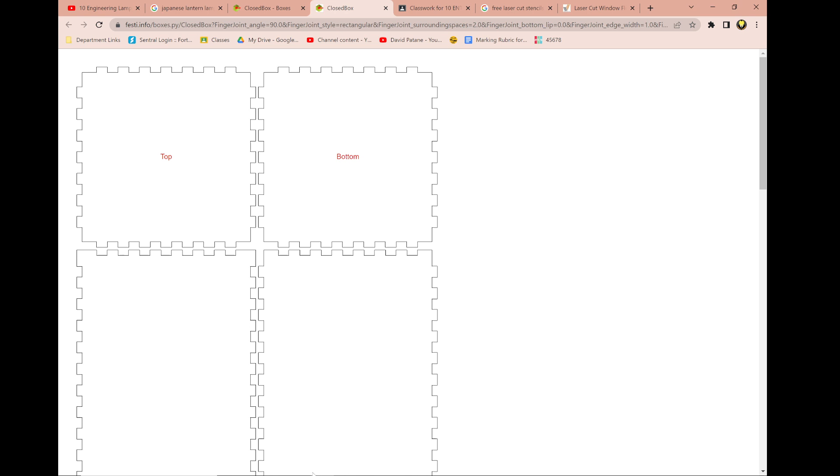Then we press over here, we can press generate. And the website should, over here, make all the file for you. This particular one, I just wanted to make a regular box. So this looks like a rectangular prism. It has 6 sides, so this will be the top, bottom, wall 1, 2, 3, 4. And here's our reference piece down the bottom that we can measure to make sense.

So we're going to right click and save it as. And we'll just save it as, what will we save it as? Lantern. The website's on the Google Classroom.

So now I'm just going to import it into Illustrator. Let's pause, I just want to make sure. So we have our thing downloaded now. We want to place it. I want to place it into an Illustrator file first because I want to modify it to get some nice looking shapes out for it.

I'm going to go here, go to File, go to Place, and I put mine onto the desktop over here, this lantern template over here. Double click that. And if I click somewhere over here, we now have the template of our lamp here.

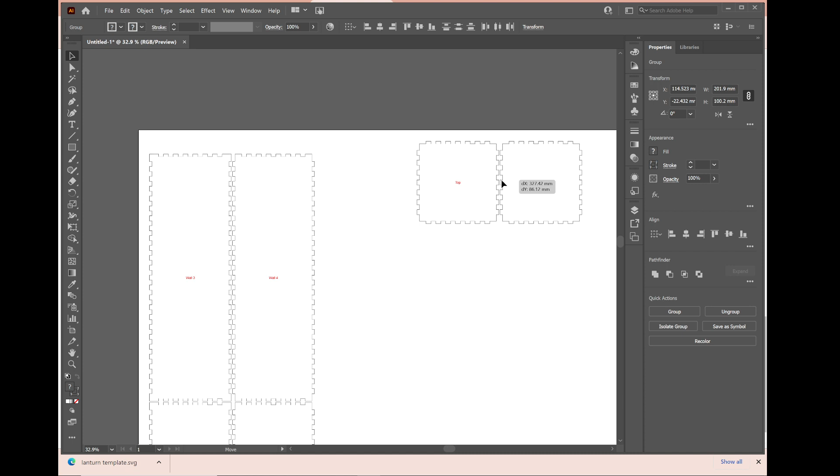For the sake of this document, I am going to make it, should I make it larger? I just have to rearrange some things because it's all not going to fit on this paper. I can right click, ungroup, and now that it's ungrouped, I should be able to click and drag and move the objects around. I can move this object over here, and I can also rotate this at 90 degrees to put it over here. For my design, I'm not going to be changing the top and bottom anyway, so that's fine.

Move this object over here, and I can use this opportunity. If I click this rectangular piece over here at the bottom, it should say the dimensions. I see the width here in the top right-hand corner is 100 millimeters. So according to my Illustrator file, the size is correct.

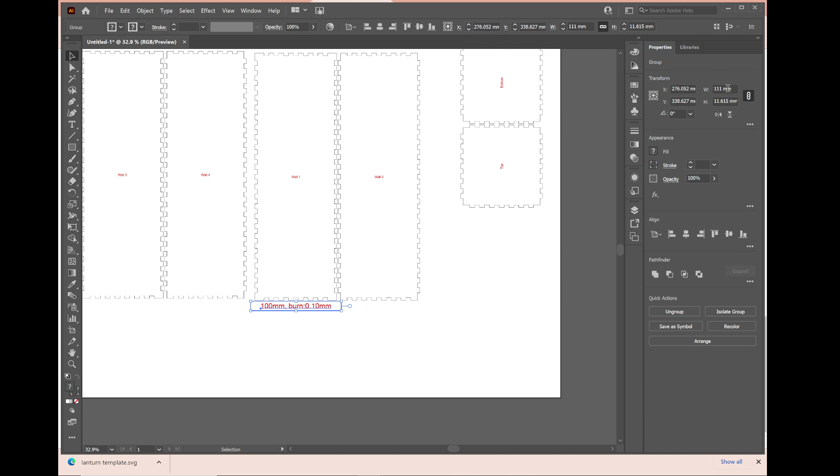From my experience, if you try to put this into Fusion 360 and get it back out of Fusion 360, the size might be off. Alright, so I have this file, and if I were to cut this on the laser cutter, I would change the colors of everything, but we don't need this for now. I also don't want these words in here because I don't remember if they're going to have a problem with Fusion as they're importing, but I don't need them anyway.

I know what's inside my design, but if you have a design where it matters what's the front-facing piece, they are coded in a particular way, as in they interlock with this top section in a particular way. So you might want to keep that and remove it at the very end.

I want some sort of pattern on this, so it's not just a rectangular wall. I'll keep one of them flat so we can see the flat one in Fusion. For the rest of them, I want a pattern.

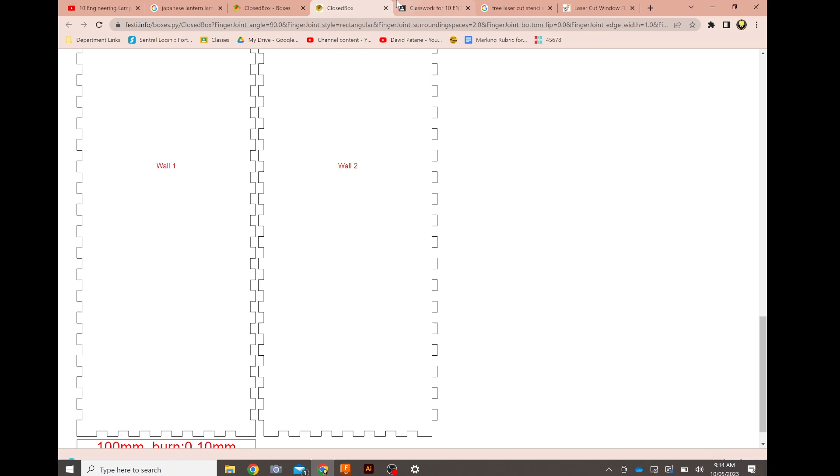So I just went on Google and looked up free laser cut stencils, and these ones look nice. This is something where it's useful having the laser cutter for a purpose like this, because this design, to do it by hand, would be very difficult.

So I want to do this. I have these designs over here, and now I'm going to go one step even easier. I'm not even going to import this file. I'm going to show you how to do an image trace, which you may have done in Year 7.

Otherwise, we can do it now. I'll just screen cap this using the Windows keys, and I want this style over here.

I'm going to highlight that, and once I've got this style copied, I can go back to Illustrator. I can press this button, press Control V, and now I have this style.

I have this artwork here that I can do something with. Actually, I'll take that back - I'm going to do it on a new sheet, just so I can get it set up, and then I'll copy paste it over when I'm ready.

I have this over here. Now this is a bitmap, which means this should have - I can't zoom in, right? This will have individual pixels, and the laser cutter doesn't like this. Fusion 360 doesn't like this. I have to convert this bitmap into a vector image.

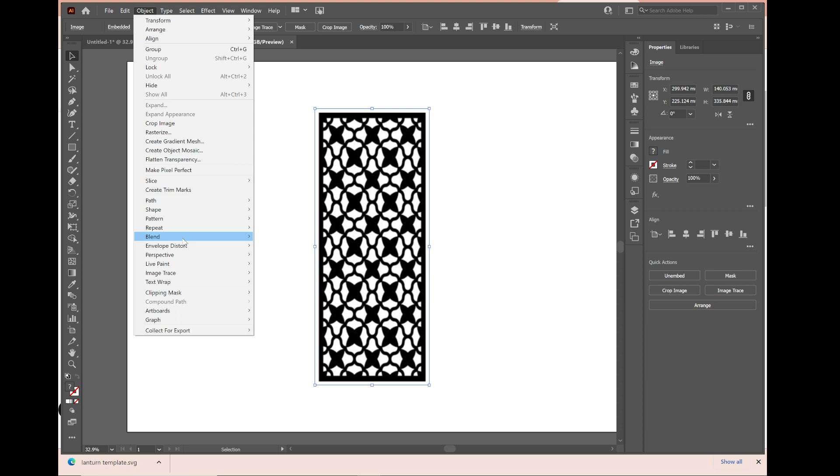So I can click it. If I click the image, I can go over here on the right of the screen and press the image trace, or I can go to Object and Image Trace, and press the Make button, and it should - now this object is a vector.

If we zoom in, we can see over here the lines are wobbly, sure, but they are very precise lines. If we compare that to what it was previously, that was bitmap. How do I go back now? Forwards. Redo. Okay, all right, cool.

So now this is something I can use. Let me just get my zoom out - too much. All right, so I can get this image, and I actually want all these pieces in the center.

So I have this thing over here. I'm going to press the expand button, and what that allows me to do is separate the individual components - if I double click it, I can separate them.

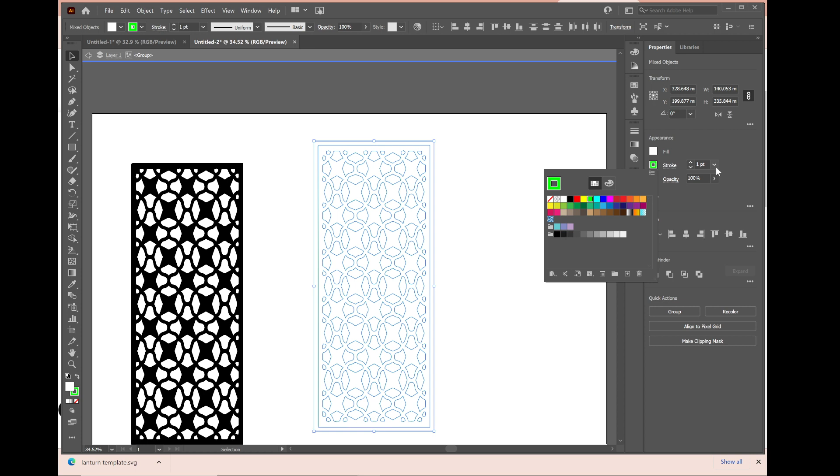So this over here is the backgrounds of everything, and if I highlight over here, we have these are the things I want to cut out. Just so I can see them, I'm going to give us a color - let's just call these green for now, just so I can see it as I move it across the screen.

I don't want these two border pieces, but this is the part I want - I want this part in the middle. So I'm going to hover over this, and I can copy that using Control C.

Over here, click somewhere, I have this part that I want to cut out. Now I'm just going to scale the size to something that makes sense on my drawing. I could be very precise here by changing the width and height in the top right hand corner of my screen, but for the sake of this I'm just doing it quickly. And then I got this shape over here.

Now let's say I want another thing. What's a meme that's relevant now? Ah, yes. It's not even an energy drink, is it? No, yeah, we've got to get - yeah, let's make it expensive.

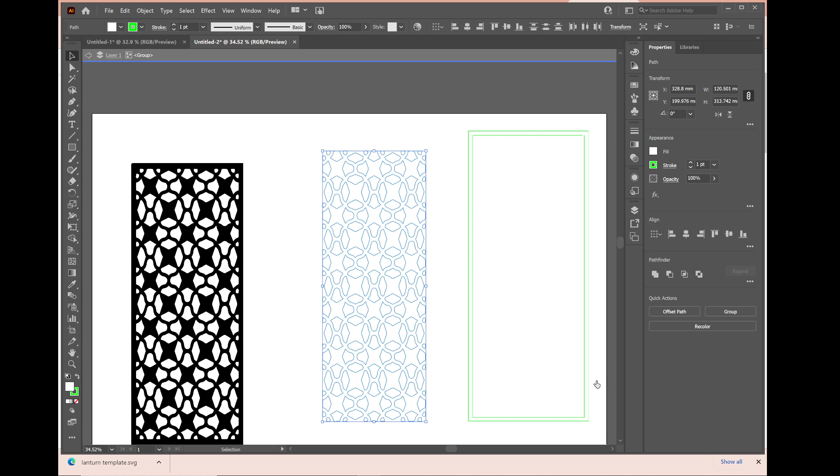So let's say I also want my thing to have Prime energy drink on it. I can right click, copy image, go back to the page that I was on before. Let's just start a new one again, just so I can keep the old stencil. Right, I have Prime energy drink. Control V - it is huge.

Can I change the size of this? All right, it's a huge file, it's a huge image, but also it's got black and white and colors. The first stencil we had was just black and white, very simple.

This one is a bit more difficult, so I'm going to go to image trace again - Object, image trace, select the object, image trace, make. It's fine, do it, I believe in you, computer.

Oh, that somewhat worked. So I have this image over here. Now we'll do the same thing - we'll expand, we'll move it outside. Now this object didn't work as well as our previous one.

It didn't work as well because this was a real world object. How image trace works is it finds the color gradient from something that's very black to very white, and then it picks a number in the middle, and that's where it makes a line. So since that's the case, I'm just going to try to get this part in the middle.

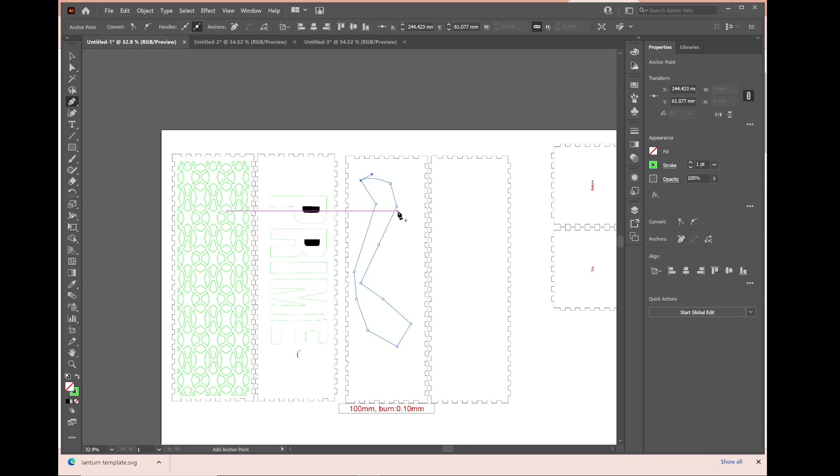And then I can also make a shape myself if I wanted to draw something with an art pen or something like that. I could just do a- right, this isn't. Look at that artwork, sheesh. I'm basically the Bob Ross of CAD.

All right, so I have this. Now I want to import this into Fusion 360 so I can actually get something. So I'm going to go to File, I'm going to save as, save this on my computer. I'm just going to save this all onto the desktop.

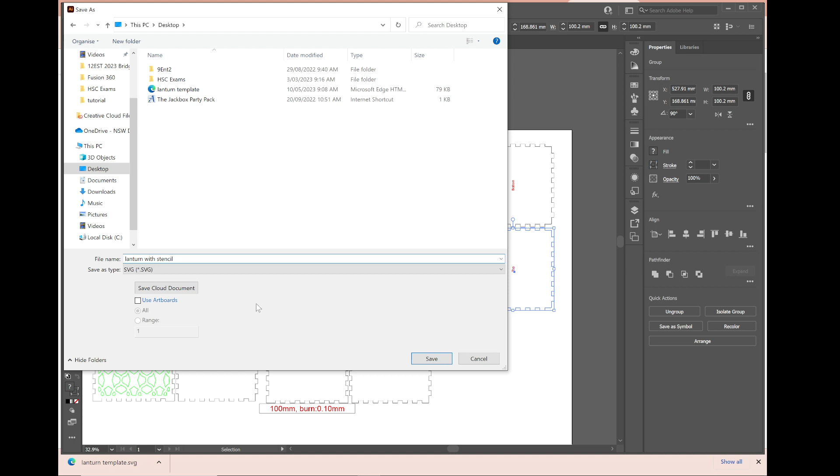I don't want it to be an Illustrator file, I want it to be an SVG, and I want it to be lantern with stencil. Lanterns with stencil, okay. Now let's go to Fusion 360 while this is saving. Save. We go to Fusion 360.

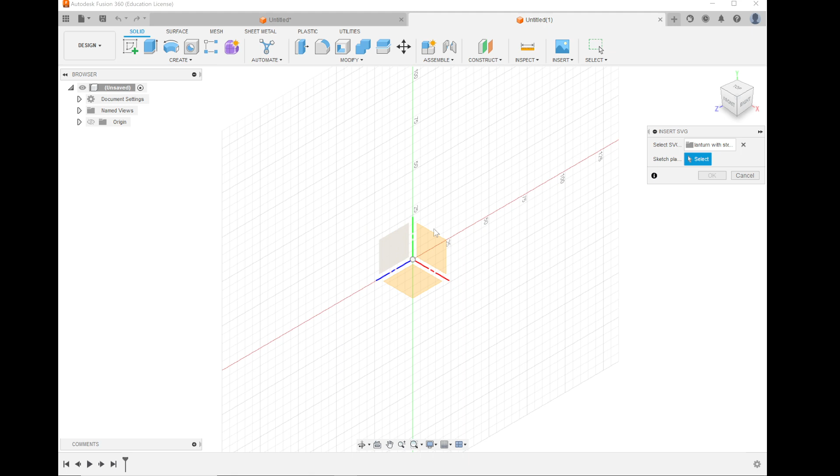In Fusion 360, I just started a new file over here. Before we do anything, we are going to go to Insert. If you press Insert, you can insert SVG over here - scalable vector graphics, I think. I press down the button, I press Insert from Computer. I go to Desktop, and I should find my lantern with stencil. I've got to pick where I want this. This is going to be like a sketch, so it's going to be 2D. I'm going to press here.

Nice, look, I've got all my images over here, ready to go. Oh look, it does keep the text, so we've got to get rid of that. All right, press OK. Give it a minute to be happy with its life choices.

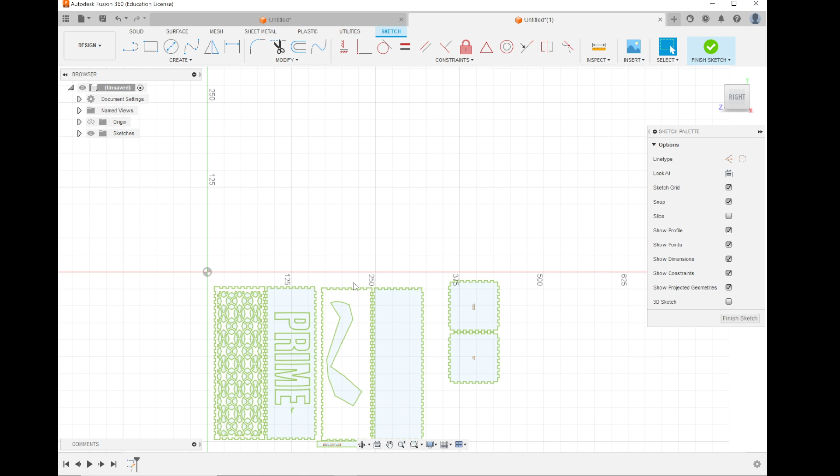All right, so we have these sketches now in Fusion 360. Now, my laptop is relatively high power. When you're importing these sketches, Fusion will do it, but it will get really laggy really quickly, especially if you start to have a really intricate shape. For processing purposes, a thing with little tiny curves uses more processing power than a massive object with a bunch of straight lines, because Fusion and SVG files in general work on things mathematically.

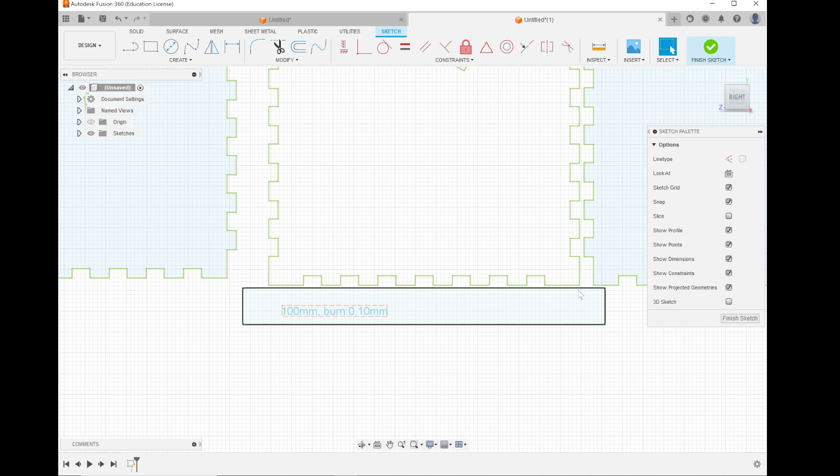So this line over here, like this thing down the bottom, this 100 millimeter thing over here, this is just two lines of math code basically. It says a line from this point to this point. Doesn't use a lot of memory. While these curves over here, each one of these is its own parabola, or imagine like a parabola but with more terms to it.

And so this is one formula for this line, this is another formula for this line. So as you do this, it gets more and more complicated as you go. Your computer might start lagging out.

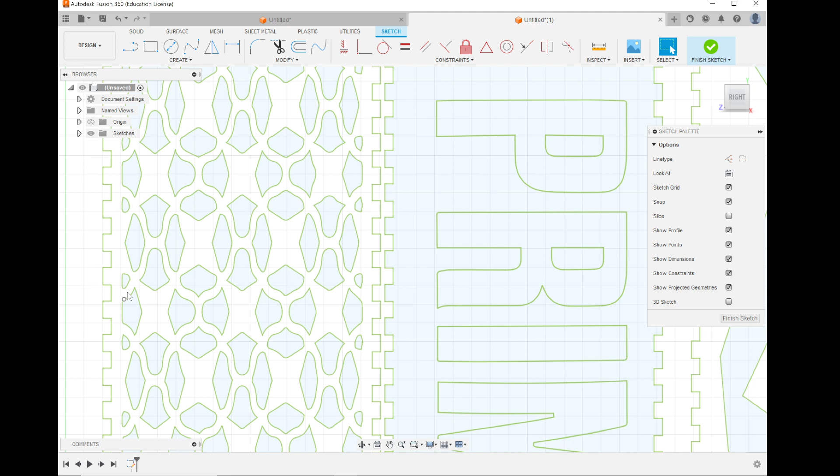So what we're going to do, to get it out of the lag zone as fast as possible, we will actually select - is this not closed? No. Before we do that, notice we have a color difference over here. This one over here is, how would you say, it's like shaded blue. Can you see it on the projector? Right, this is shaded blue, while this one is not shaded blue for the most part.

That means, according to Fusion 360, this is not a closed object - there is an opening somewhere in here. Now, I don't know how to find where this opening should be. Oh, is that it? I think I found it.

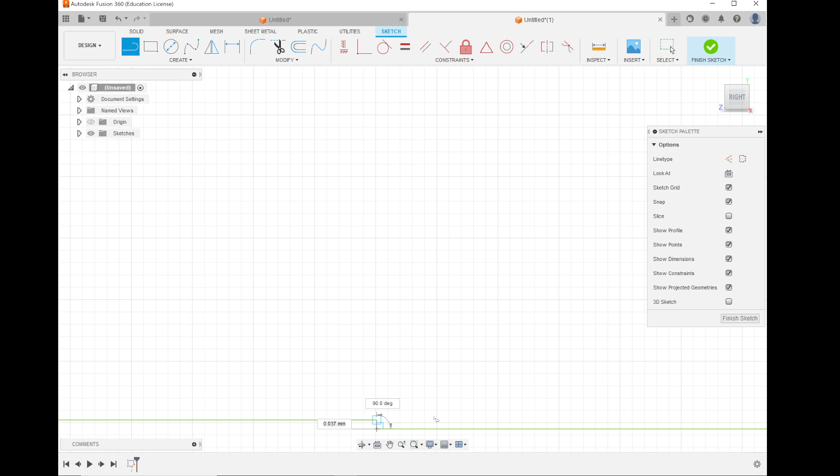There is a way to close it. We're still sketching, you can just link that. We'll see, let's see if it loads up.

We want to get it out of this sketch. It was, yes, good. All right, so that's one. That thing would be ready to go. This one, it's probably in the same spot.

I don't think this is an error due to... I think this is an error due to the code that we got from that website. That website was actually made by a bunch of people in a hackathon, so they made the basic part of that website in 24 hours as part of a competition. Obviously it's been upgraded over time, but it's still done by like some dude in a basement on a laptop. So I thank them for it, but the code is not the best, as it does small issues like this. And when you're laser cutting, it doesn't matter.

This joint over here is only 0.037 millimeters. The laser cutter doesn't care about that inaccuracy, but Fusion does. So once I close this, it should fix that issue for this side as well.

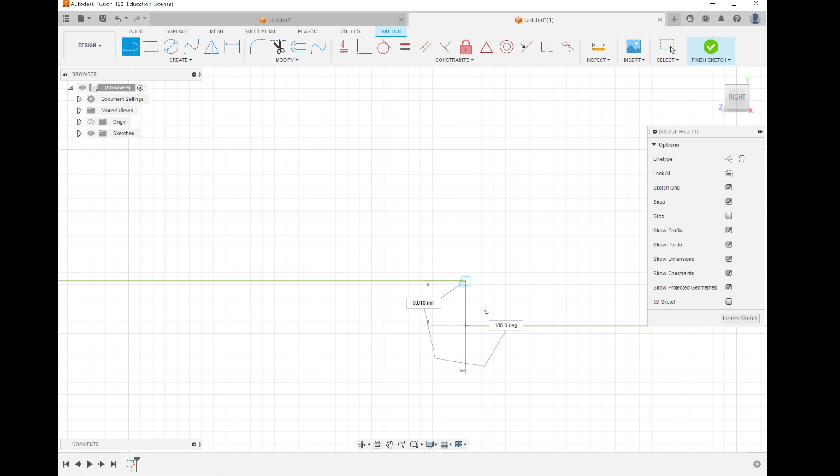Oh no, Fusion did not like that. I'm just going to pause.

All right, we're back. Yeah, this is the most temperamental part of Fusion. Do this part in a nice clean document, because when you have nothing else important on Fusion that you need to do, this is where it's very likely to crash. This is the least safe part of Fusion from a software perspective.

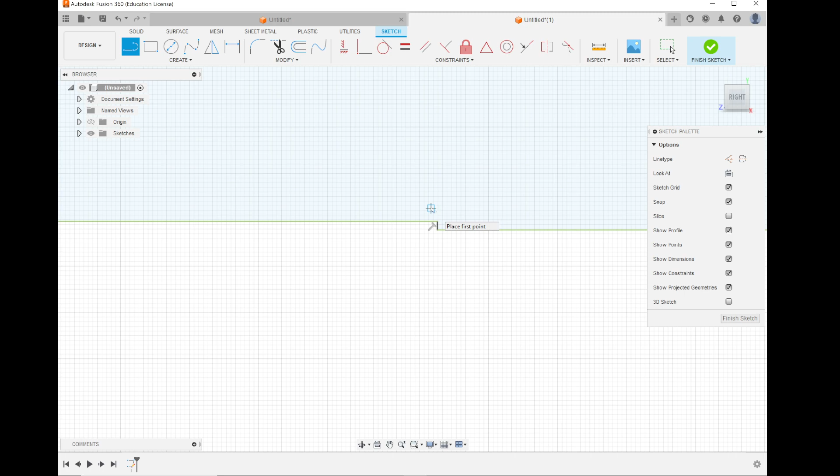It's using a lot of memory, so if you're dealing with a device that doesn't have a lot of memory, this is where bad stuff can happen. We want to turn this now into sheets of actual things.

So this is a sketch that's in 2D. By default, when you import an SVG, it's going to be a sketch. I'm going to press the Finish Sketch button over here. So now I can deal with my 3D objects.

I'm going to extrude. If I press this shape over here, it's going to extrude it for me. Fusion allows me to select multiple shapes. So for this, I'm actually going to press this as well, and we'll get to why.

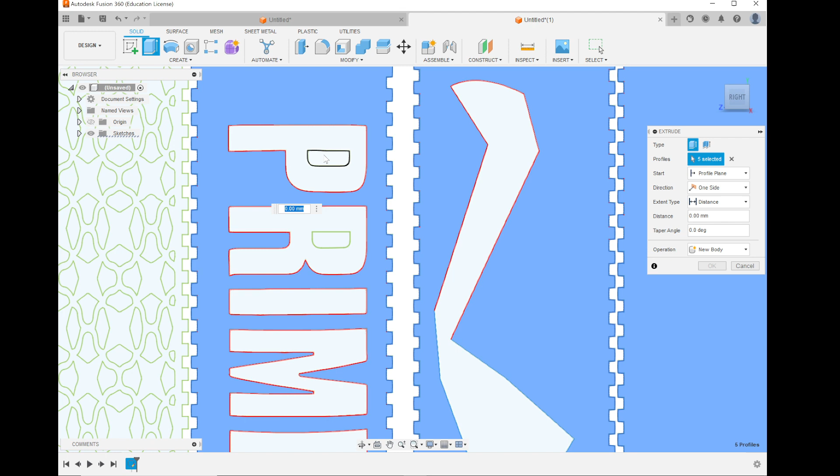We actually want, this was an artifact of our image trace. Your life will be a lot easier if you pick an image that's already a stencil. Like this one over here to the side was already a stencil, so it made it a lot easier. For this one, I'm just going to press the outside part like this. And yep, now I'm going to extrude it.

The distance I'm going to extrude is going to be 3 millimeters, because my object was 3 millimeters. So my timber was 3 millimeters, and the cut size with this was also 3 millimeters.

Uh-oh. Okay. I'll unpause it when it freezes, when it unfreezes.

So if you do that extrusion and it all works, you're now in this phase. Now, once you're in here, most of your problems are gone with regards to the processing power of Fusion. This is what Fusion wants. This is a nice, clean object for it to work with.

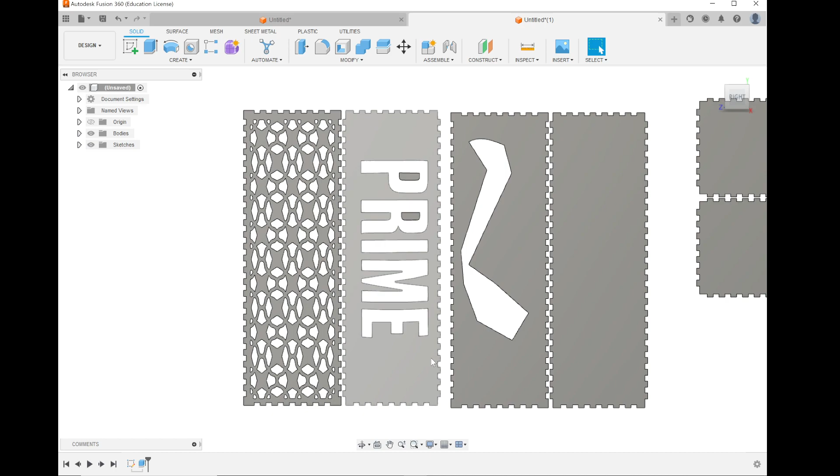You can actually move it now, and relative to before, you can move it as fast as you want, as there's no graphical problems, because these are all solid objects. Right? This is peak CAD, what it wants.

Insert the dubstep. All right, but we don't want this, we want pan, I think. Okay, so these are now my sheets. This is like what it would look like if I pumped this out on a laser cutter.

What we can do now, actually doing our design of this, is quite simple now, because we can assemble these together. Let's look at our bodies. We have a lot of bodies over here.

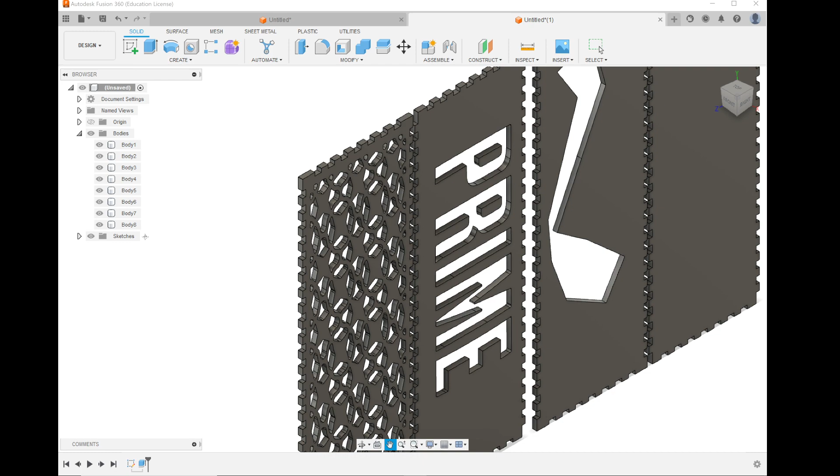If we notice, what's going to happen when I try to cut this? Yeah, it's going to fall off. We can fix this - this is where we're doing some post work to make it look better. Let's go and make like a joining piece. We can either go across, I think vertically looks the best. But let me show you what I mean. Yeah, we're going to make like a connecting piece so it will hold when we laser cut it.

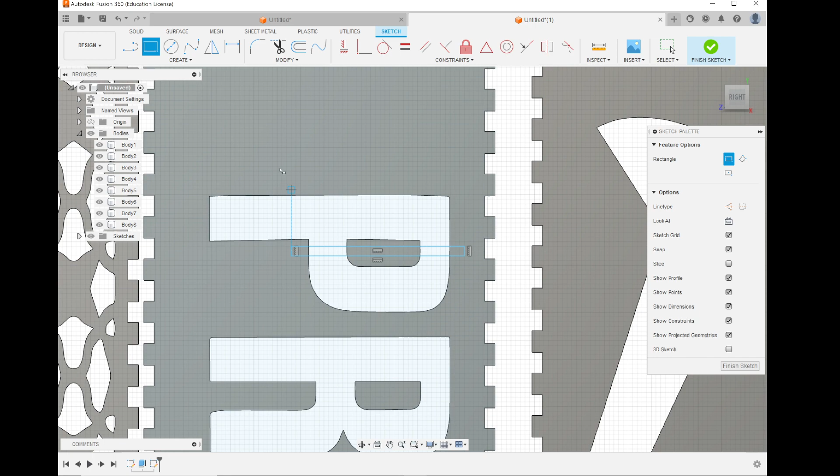It won't look exactly like Prime, unfortunately, but we're going to do something like this. You might see this before on signs - graphically they do this because they'd rather it all be on one stencil. This piece over here is 2 millimeters thick, so it's not massive. Finish sketch - this is if you're bringing in letters, or if you have an image with objects that need to be separated, you'd be doing something like this.

So now I have this object over here. I'm going to extrude - select these shapes that I just made. Here's the issue: I can drag it over here and make an object this way, no problem, but I actually want it to connect to the other piece. So as I go backwards here, I don't want to go minus 3 millimeters, because that's how thick the timber is... or is it 3? Oh, I did minus.

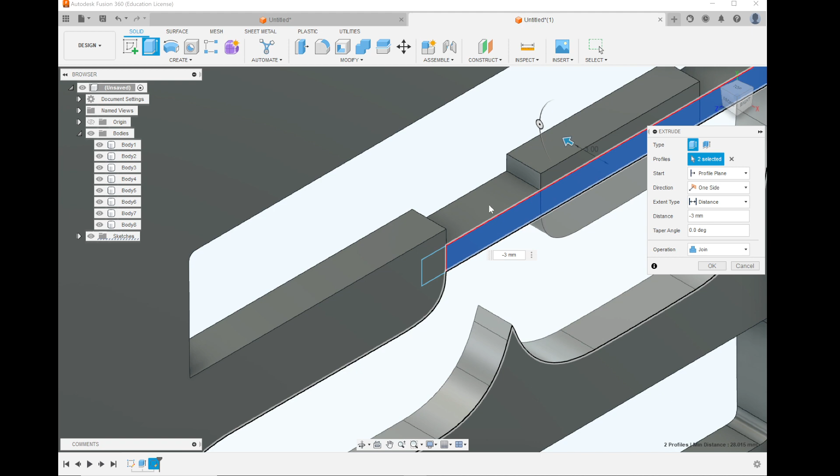So this red symbol you see over here means Fusion is identifying that you're extruding a sketch through another object - it assumes you want to cut. Because it assumes that, that's what it's doing. We can fix this under the operation area - instead of cutting, we want to join. So now these are going to be the same object. If I press OK, that's what we're going to get. It's obviously not exactly the same as the Prime logo before, but all things considered, the message gets across.

This will work. All right, now let's actually start building this lamp.

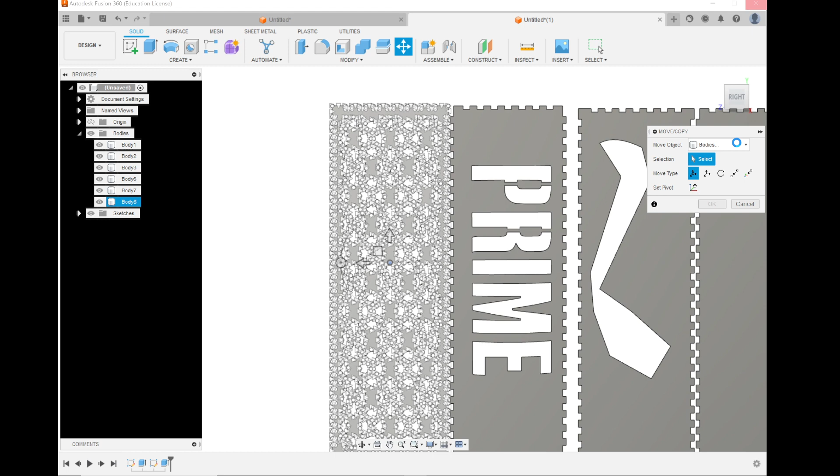In Fusion, we can move our objects around. We press this tab over here, move and copy. So I can click this shape over here, select it - I want to make sure I have bodies selected. And now I can... oh, that's pretty hectic. Can I get into 3D space, please? No? Still a bit laggy. Okay.

This object over here - do we see how these arrows and planes relate to how we want to translate it? If I move it in this plane, I can move my object in this direction, in the YX plane. I can also rotate it - over here I can rotate it 90 degrees. So I could manually move it to align it up together, and then start making my box.

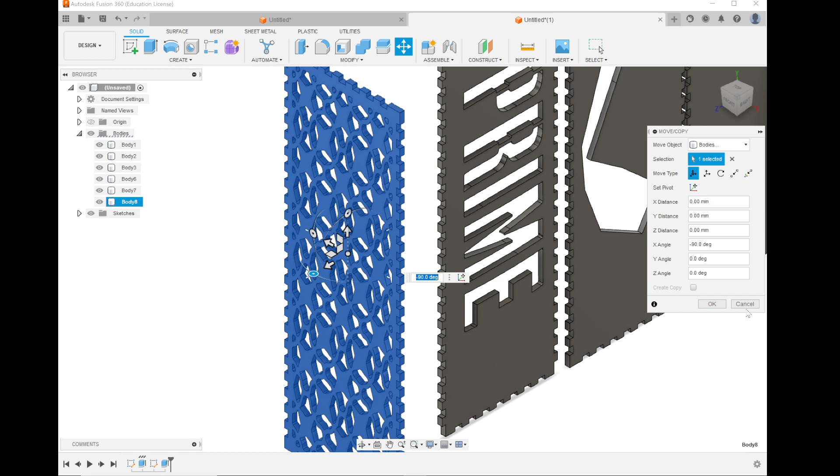But there's actually an easier way to do this. These things should all mesh perfectly, as good as they can get based on that stencil thing we had. So we're actually going to use this tool over here - the Align tool. If we look at the image on the Align tool, we get two faces and we can match them up together.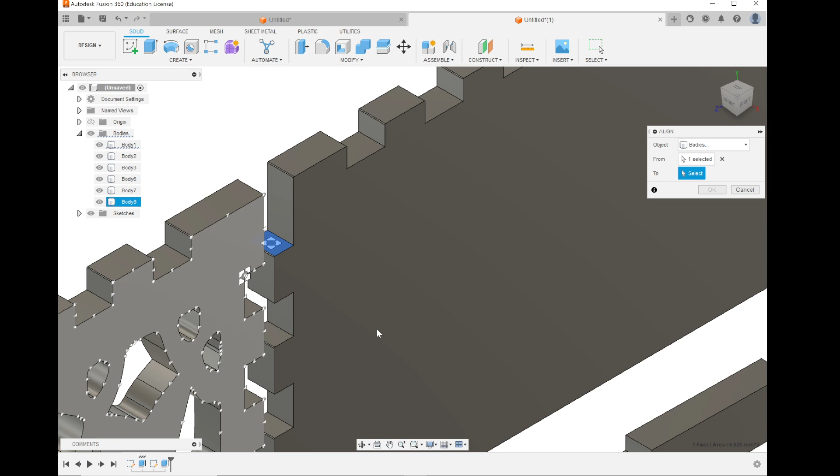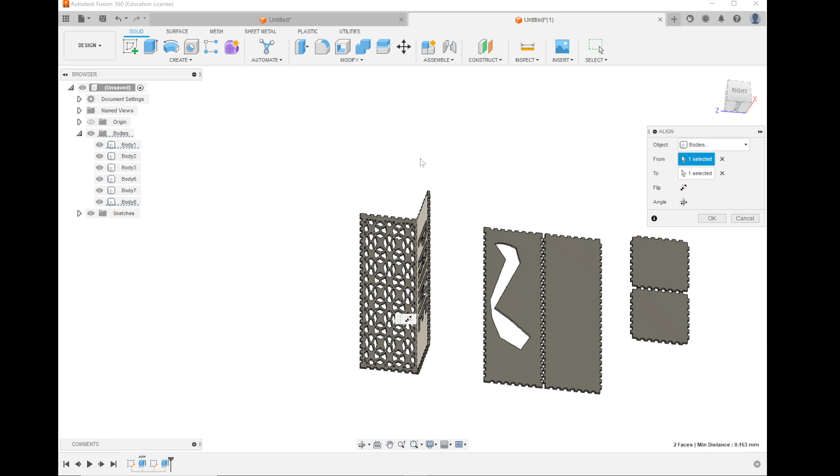So we actually want to align - if my maths is correct, this shape should align with that shape over there. But we want it to be flipped, and rotated at 45 degrees. So now these shapes... did this work? Let's see. There we go - it has automatically lined up.

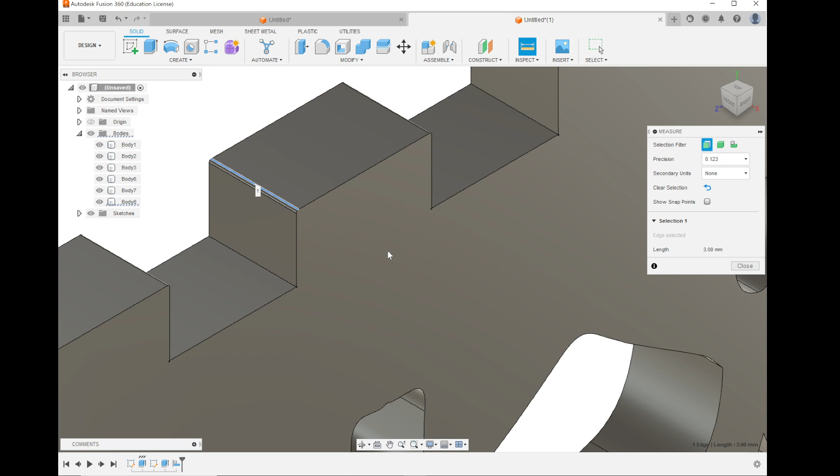Now I think there may be an issue with this sketch, I just want to test something. Inspect - if I inspect the length of this part over here, that should be 3 millimeters long. Yep. The gap over here should also be 3 millimeters long, but it's 2.1. I'm going to go back to my sketch from the start - remember how we did that line to measure? I should have actually checked first to see if that line is actually 100 mil. That original line we had there was 87.7 millimeters.

So this is an uh-oh spaghetti-o moment. That meant it wasn't large enough. So what I will do - what was the actual length, what was it? 87.75, okay.

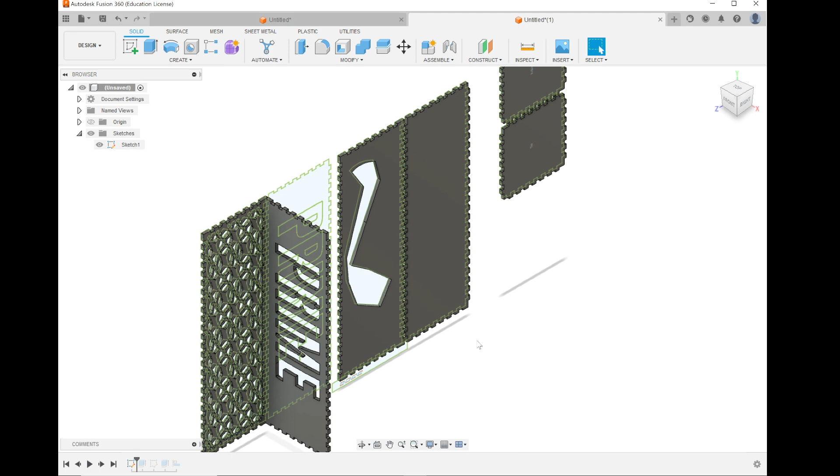87.75 - so what I'm going to do is go to my history tab, bring it back to here. Scrolling my history tab back, we're in this phase over here - I actually want to enlarge my drawing. What I'm going to do is create, edit sketch. In this sketch, I am going to - where's the scale button? Sketch scale. Right, I'm going to select all the entities I want.

I'm going to select a point that they're all going to scale by - let's just make it the origin. And if I go down here, I have to pick what scale factor. My original size was 87, and I want it to be 100 - how much larger does it have to be? Anybody? Matt? Anybody? Maths extension! If your original size is 87.7 and you want it to be 100, how much larger does it have to be? 0.2, what? Well, we're lucky that we can put in formulas inside our thing - 100 divided by 87.75.

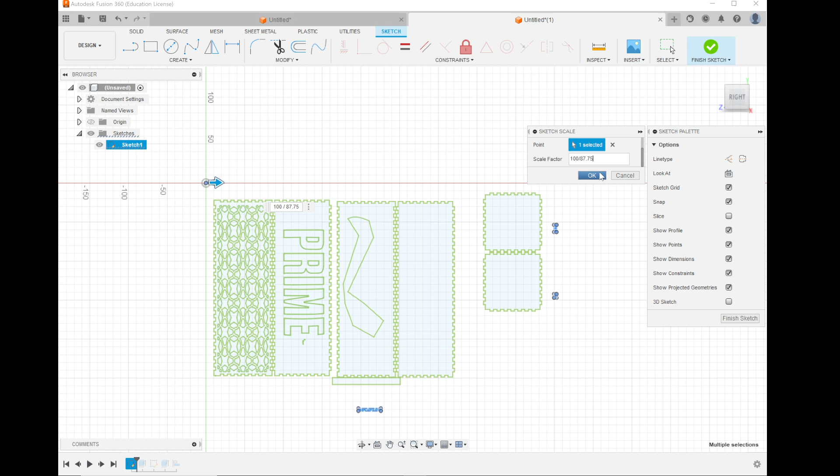87.75. I can actually put that number in, and then if I press OK, if it works, come on, we should get that scale in.

Now, if we inspect this element over here, oh, what? Why didn't the scale work?

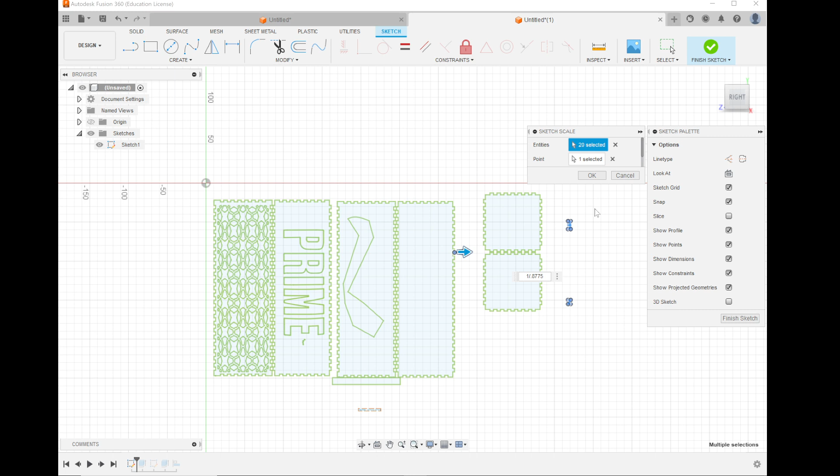Uh-oh. All right, instead of doing it in the sketch, for those that were here, instead of doing that through the sketch, I did it outside of the sketch. So I used the modify thing over here, and I just used this scale over here, and I selected the whole sketch through here. And that seemed to work, because when I measure this element over here, we get a length of 99.999, which is close enough for us.

And then we just do the same steps again. Now we don't have to change any of our previous actions for the extrusion. That should just work. We might need to change the location of our sketch for the crossbars, so we'll change that. The parts that were holding like the middle of the P — the supports, yeah, that's what I meant. Come on.

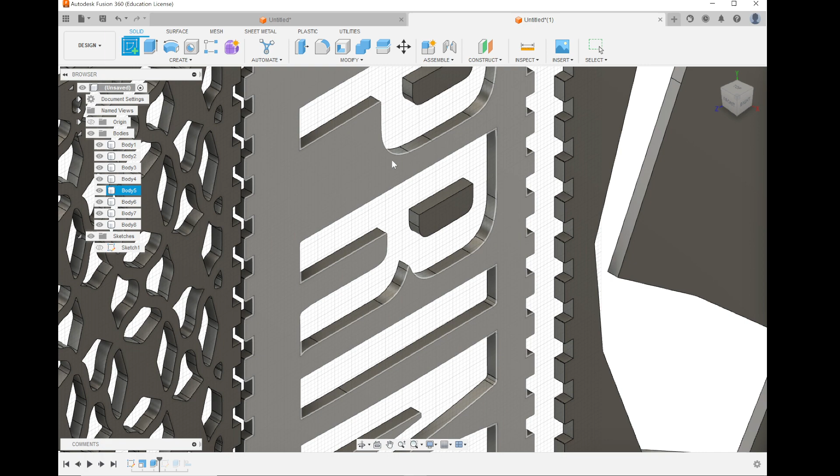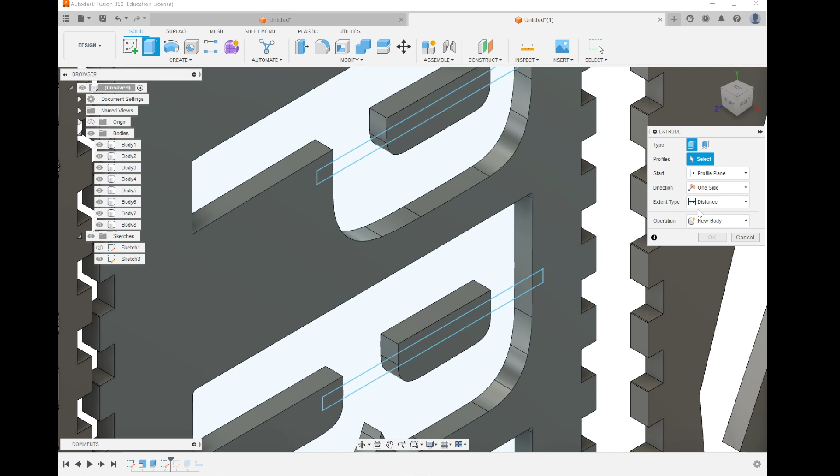So we'll just make that again. We will. And remember, we have to make this join.

All right, so I think now we're ready to start combining this to make it an object. So we're going to be using the align tool.

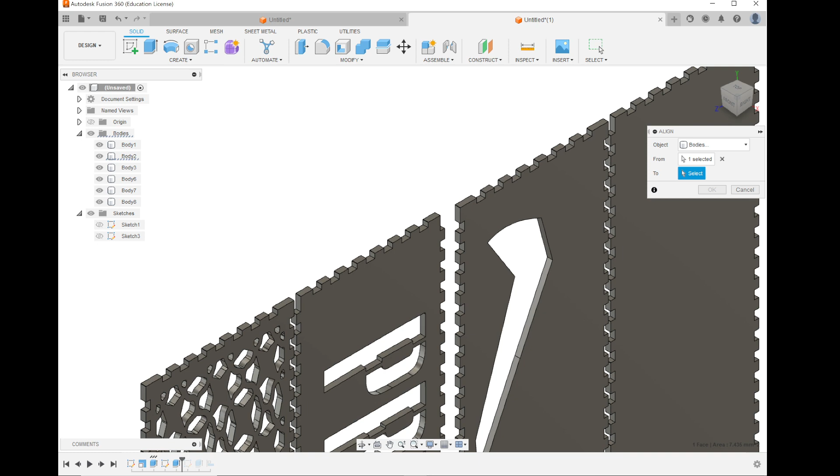So let's go and actually use these top pieces to do the alignments, and so we can align everything to this. In this case, we want this face to be aligned with this face over here.

It's going to be flipped, and it's going to be rotated. There we go. That's going to be our top piece. Okay, and then we can continue doing the rest.

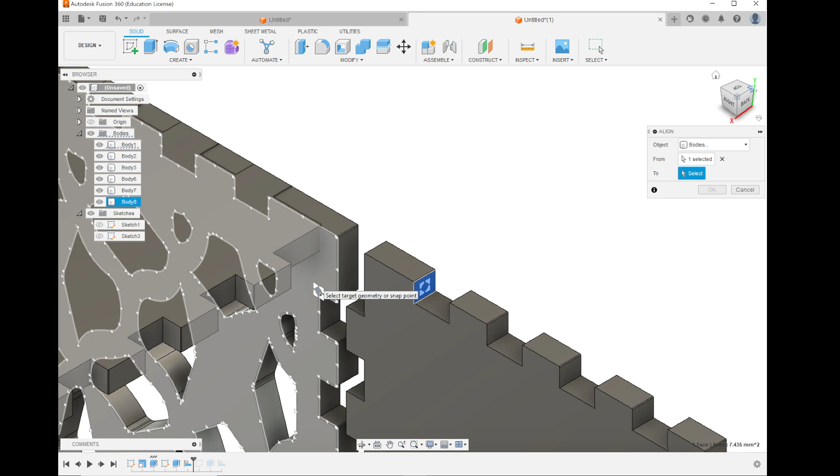We're going to align this with that piece. Flip.

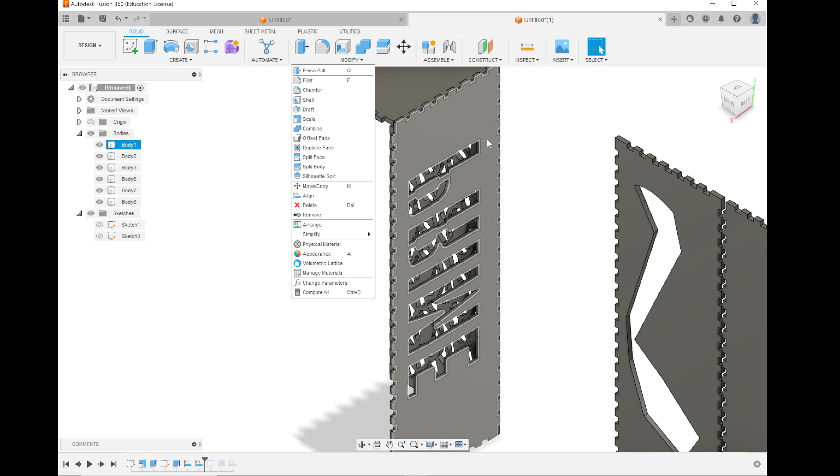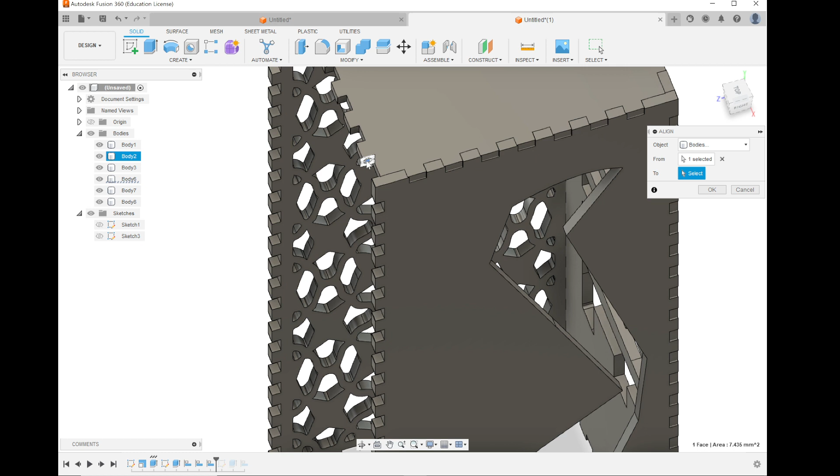All right, for the sake of this rendering, I'm not going to bother with the bottom part. Oh, should I just put it in? Yeah, why not? Let's finish it off.

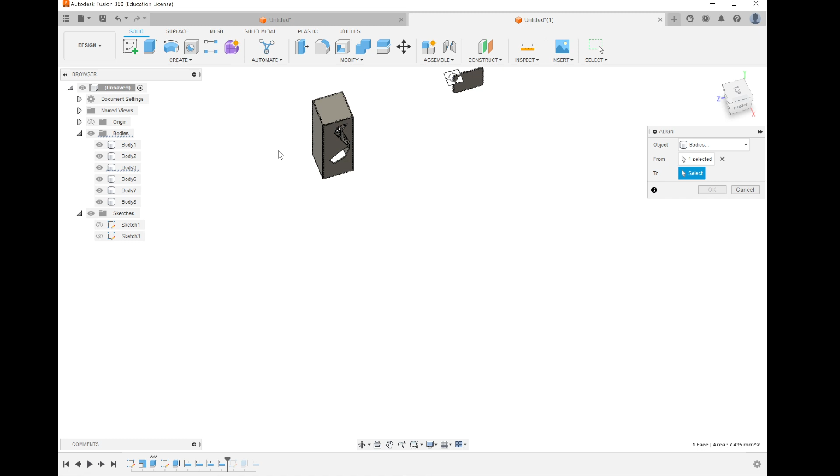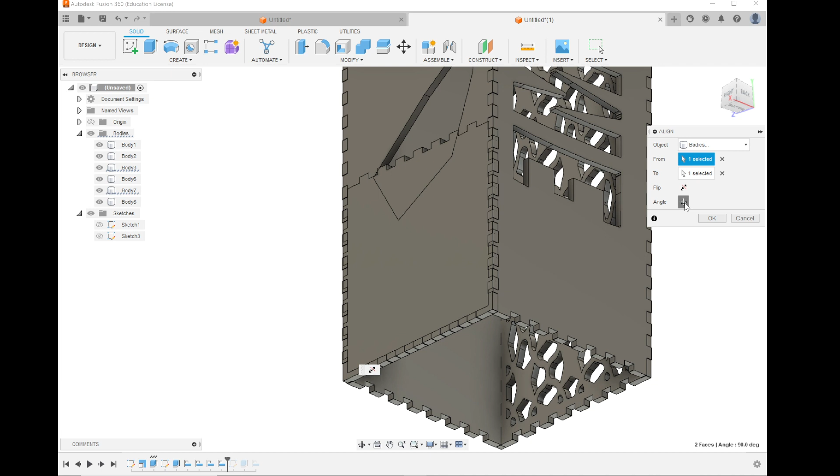Come on, zoom in, please. There we go. All right, so this thing is done. Now we have our tower and we've put it into Fusion.

All right, we're not going to make it out of this material. We're going to make our tower out of wood. So we can just actually highlight it, right click on the tree on the left, and change its appearance.

Now there are actually different styles we can go for here. Selected everything. If we go to wood, there's two types of wood, and I spoke about a bit in the previous task.

Okay, there are two types of woods in this thing. One of them is just like an exterior colourful wood, like if you imagine the graining you get on tables and such. If your object has just exterior components, that's fine. You can also do what's called solid wood, and what solid wood will do is, when you look at a standard piece of timber, what you visually see when you look with the grain is like long, thin lines pointing in one particular direction. But if you look at the end of the plank of wood, you'll see what looks like rings or part of rings.

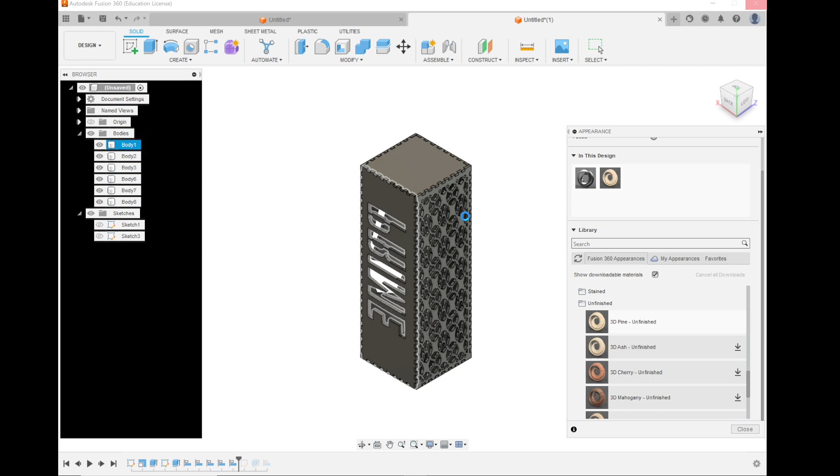So if we zoom in, see how we have that different artwork? It's making it look more realistic. It doesn't have plywood, so that's just something we've got to artistically accept.

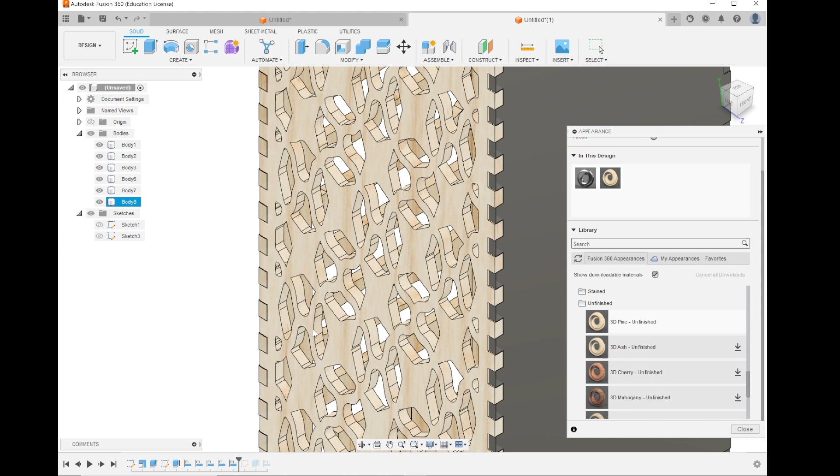It will also try to guess what is the better side of the timber, which is the side that has the long thin lines. I believe Fusion will try to predict that by whatever's the largest flat surface, which for these flat packs should easily detect it. If you're making a thing out of a solid cube of wood, it might be difficult for it to determine which one. I don't know if there's an option to manually change the orientation. There might be. You'd have to Google it to find out.

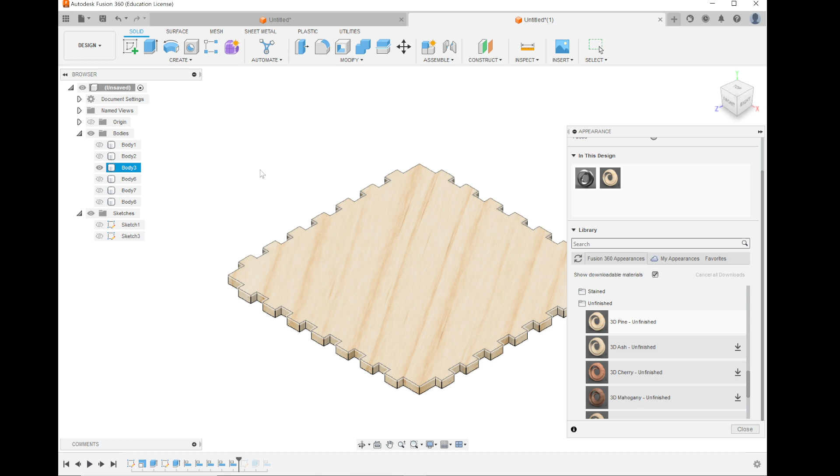So we have these things over here. Now this thing in theory could render straight away, but before we do our rendering, we need to get some sort of light source. So to do this, we're just going to make like an LED, having LED lights shining.

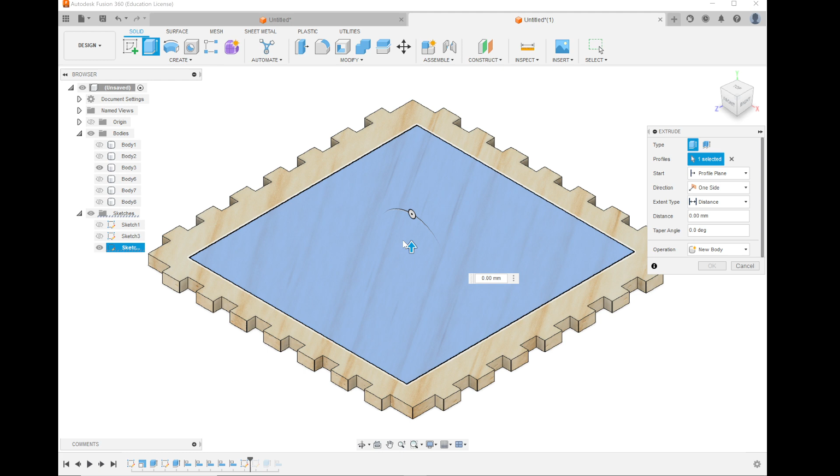So what we'll do is we'll go to Sketch. We're just going to pretend we have the lights shining up from the bottom. If I do this sketch over here and it loads up, we will just do a regular rectangle, or square. We'll press Finish Sketch. Now, this is a common mistake people have on Fusion, so I'd like you to watch this carefully. I have drawn this sketch on that piece of timber. If I go to extrude it, if I click that sketch and extrude, by default...

If it's actually touching the piece of timber, it might want to join. We don't want this to be the same piece of timber because we want to make this like a light source. It's going to be emissive. So we have to make sure that it's a new body when we make this. If Fusion detects you going into another piece, it's going to assume you want to cut. If you extend from another piece, it's going to assume you want to join them together. But if you just want to have two pieces that are next to each other, you have to make sure that setting says new body.

So new body, all right, an appearance over here. Uh-oh. Did it join them together or did it just freeze? Did we lose all of our artwork? Oh, lovely.

Oh, maybe it just doesn't do it in appearance. Okay, so for this we want miscellaneous. No, not miscellaneous. Where is it? No, not physical material. Sorry, we don't want physical material. Physical material, this is technically all aluminium because that's the default material. Or is it steel? Doesn't matter. This is more for when you're doing simulations.

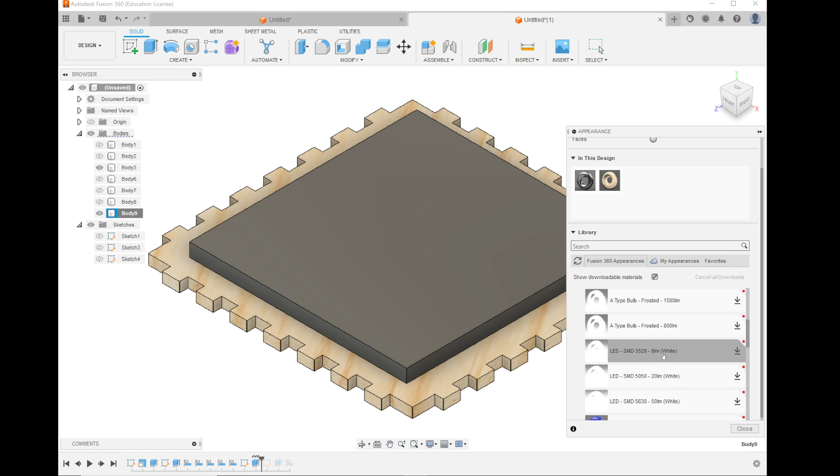My mistake, I should have right-clicked and pressed appearance, not physical material. If I press appearance and it loads up, we want to find miscellaneous, emissive, and we can just get a bulb. Or we can get an LED. We don't know exactly which type of lumens our LED is, but we're going to assume our LEDs are cheap, so we're going to pick an 8 lumen LED. I can highlight over there, that thing's going to be emitting light now at a particular rate.

I press close. Now the magic's going to happen. Before we do anything else, I'm going to save my work.

Not CNC cars. On the table, please. 2023.

I'm going to save my work because, as we know, Fusion likes to crash a lot, and at this point, we've spent almost the whole double lesson doing this. Don't want it to crash.

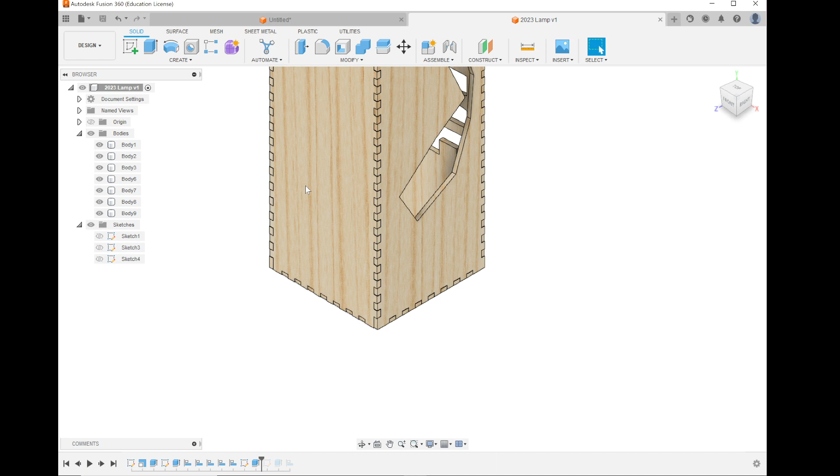I'm not going to laser cut it, no. Why? You have to change the colors to like red and stuff. We can do getting it ready for laser cutting. Add another, we'll do some renderings and we'll see. But this is ready. We can see by the file name has changed over here to 2023 lamp v1. Right, this is all good.

Now let's go do some rendering. We spent all this lovely time making it pretty and aligned. Now we have our lamp over here. We want to get that sponsorship deal, so we're going to arrange it to look like this. Right, that's our lamp.

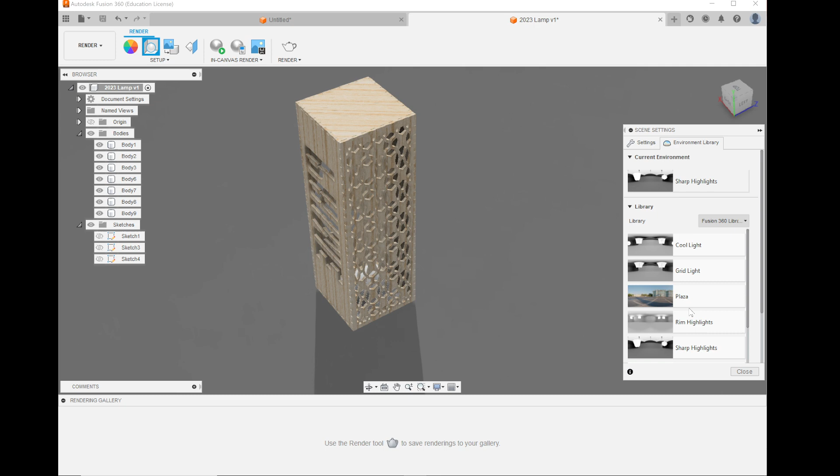Over here, can we also set up an environment? We can put a scene, I think. Environment, yeah, let's give us an environment. What environment you got? On the street. Oh, on the street, yes. Beautiful. You might be able, if you search the web, to find environments that look like living rooms or bedrooms, and then you can put those in. I don't know what template, there we go. Beautiful.

There's probably some of these environments that are like attach custom environment. Some people may already have one, so have a search to see if there's one that exists already. Let's say I'm happy with this particular setup for my thing, I can then go to render.

Now you're given a few options over here for rendering. Because you're on your student account, you can use cloud rendering. Cloud rendering means you're shipping this file to the servers in Seattle for Autodesk. They have big render farms, big racks of computers that just render this stuff, because not everybody has high-tech rendering computers.

For this relatively easy render, you could do this on your laptop yourself. I would recommend you have your laptop plugged up to power, and don't play any video games while this is happening because it's going to be using all your processing power.

Even though you have unlimited, you're still allowed only a certain amount of renders at a time. It's to stop you flooding the render farm with a bunch of renders.

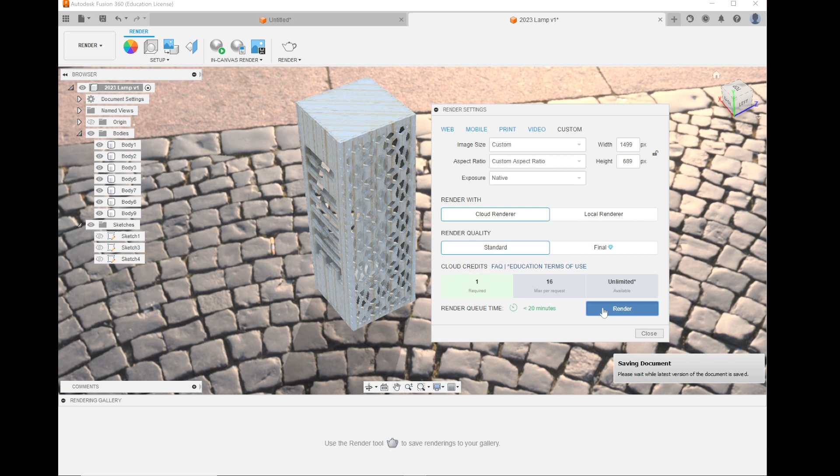Once it starts putting the rendering on the queue, I'm just going to pause the video so we don't have to wait the time. When you see this thing over here, that means it's rendering - it's sent to the place, and the place is rendering it for you. It's been submitted. While this rendering is happening, if you click it over here, it says your job is currently in the rendering queue, so it's off to the computers.

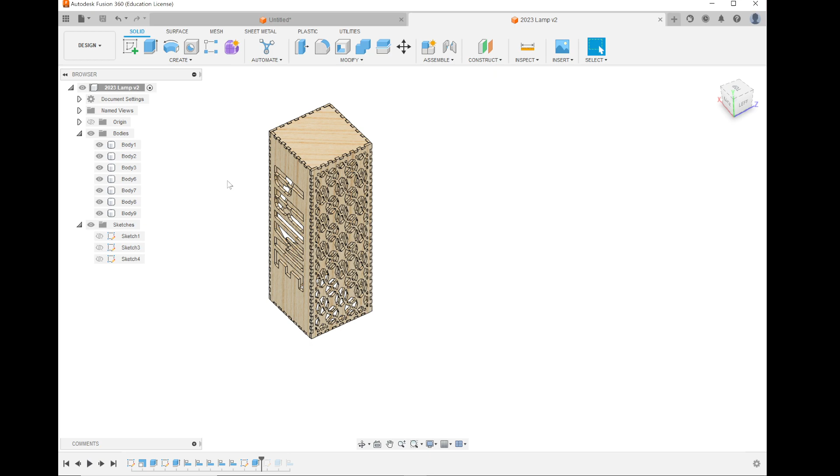I want to get this file back into Illustrator because Illustrator is how I send it to the 3D printer, the laser cutter. So this face over here is actually different. So what I can do is hide all the other bodies for now. This one over here, I want to get this surface so I can send this surface to Illustrator.

If I click on this surface and right-click it, I can press create sketch. Give it a second to load up. And if we look on the left-hand side, there should be another sketch popping up here, sketch number 5. Now I'm not going to do anything, I'm just going to press finish sketch. I've made the sketch, but I haven't changed it.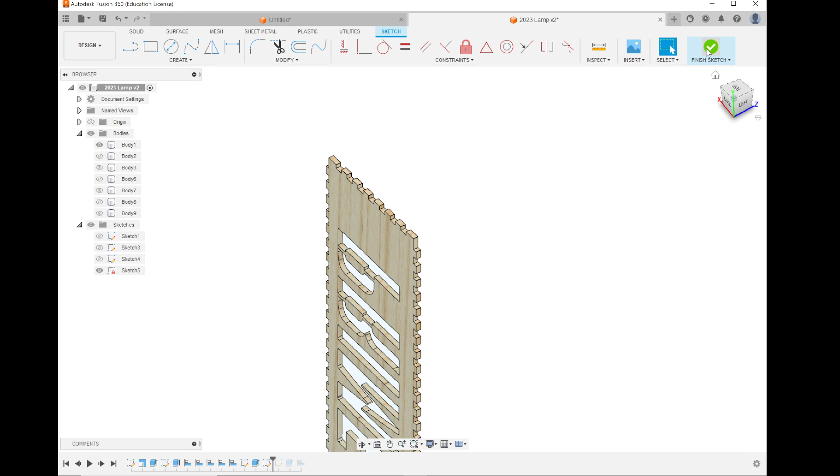If I hide this, we'll see what happens. Can we see how there is still the sketch here that has all the detail of that flat surface? Now note, you can only do this if the surface is completely flat, because sketches have to be on flat surfaces.

But now I have this sketch over here, I can right-click this sketch, I can save this sketch as a DXF file. A DXF file is another vector file that can be accepted by Illustrator. So save it as a DXF. Let's go desktop and let's say new prime. Save. I can then go to Illustrator.

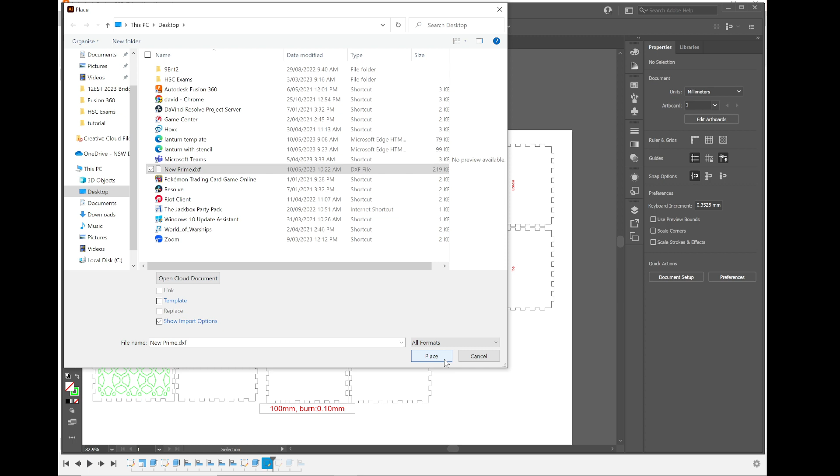File, place. We go to desktop, we find the new prime DXF that we got from Fusion 360. Show import options, place. Should be fine, okay, yep.

And then if I pick somewhere to place it over here, we'll worry about the actual sizing later, because I will have to adjust the size when it comes in from Fusion. But we see here, this one has the new size, it has the cross parts that we made in Fusion. The scale is off, right? This piece is not the same size as this over here. So I'd have to do the same function.

One thing that we have going for us here is we know what size we need this one to be, because we can hover over this.

If we hover this, we know the size has to be 100.2 by 300. So if I do the same thing here, I can change its width to 100.2 and its height to 300.2. There you go. So now this thing, granted it's inverted, you could probably flip that with this over here. Flip, there you go. So now you can import your shapes in from Fusion.

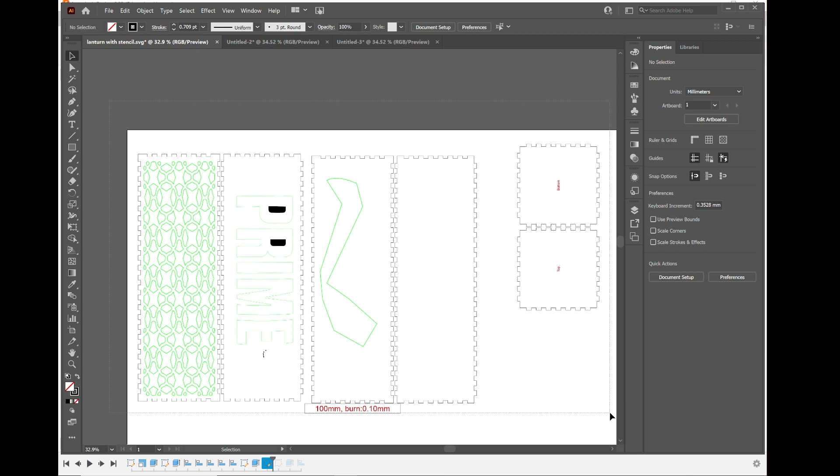Now to take it to the laser cutter, all we'll have to do is get the colors that we want for this particular one. I deleted the one from Fusion, but you could keep it if you want. We have to highlight it. The rule for our laser cutter is it has to be RGB red if you want to cut something completely, and the thickness has to be 0.001, with no fill.

Now it's difficult to see because it's so thin, but this now would be ready to take to the laser cutter. We would get this file, save it, put it on a memory stick or email it, load it up onto the computer in the laser cutter, and this can start cutting out that shape.

Let's see if our drawing, if our rendering is done. Oh no, before we do that—

I like this lamp, but let's say I also now want to make it look like it's on a desk or something. So I've actually downloaded some objects. How do I put them in?

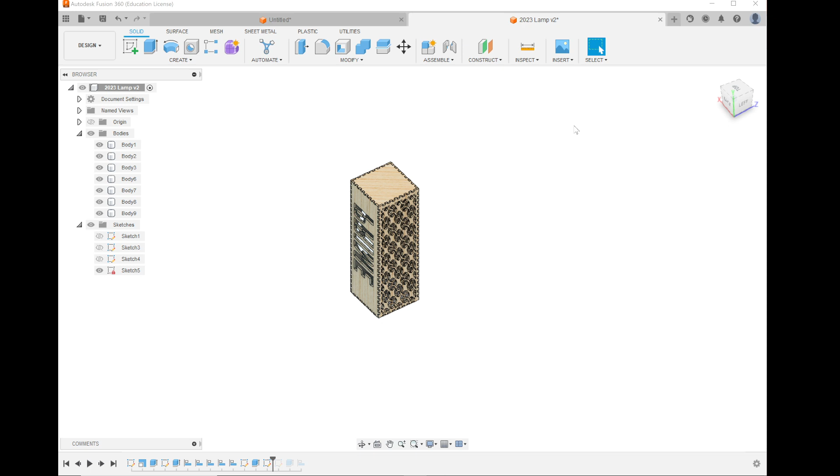Insert, insert mesh. Let me look in the downloads file. Okay, I downloaded this from a website, which I'll show you, but I don't have the link yet. I'll put the link on after this video.

But if I open this up, over here, look at this—we have a coffee table already pre-made. If I were to put this into my report, I would have to make a note that this obviously is not my work, right? I don't know the exact scale of this thing, and I don't know the exact coloring, but now I'm already building an environment for my lamp to fit on.

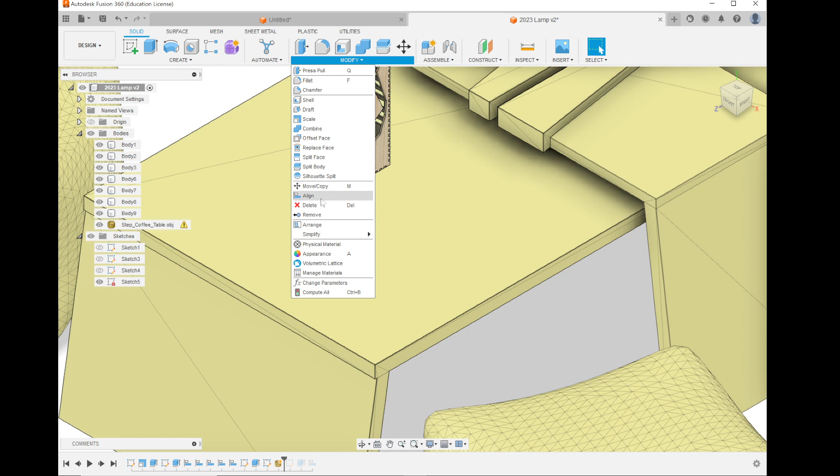I can use my... what can I do? I can move. Does that work? Yeah, that works.

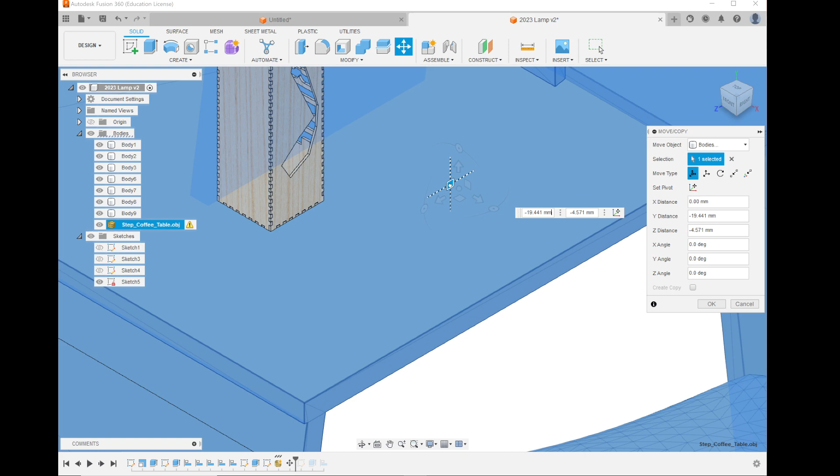Okay, so I could get this object now, and I could choose—right, I have this object over here. So that's where my lamp's going to be. I could also send this now, if I save this—I can send this object to my rendering as well.

Some files already have colors and stuff put into them. Fusion is not the best at that, because it's meant more for an engineering perspective. But it's also fine for creative purposes to pick this background to be a very dull color, because you don't want our object to be confused in it, or in this case, all metal.

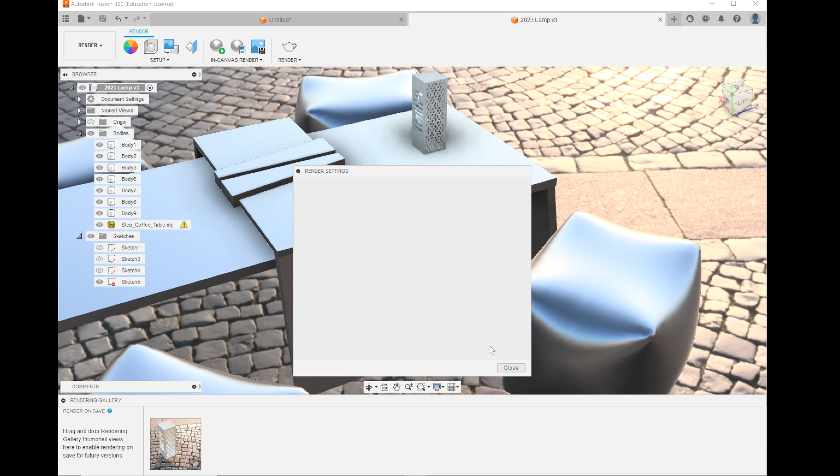Good. While I'm setting this one off to render—right, so that's our lamp over here, just chilling. Oh, now we have a bench in the middle of the plaza. We could do the same thing, render, and I'll send this one off to the cloud as we look at our job we had before.

So this is the one we did before. Let's have a look at how the lights and stuff work. All right, there we go. That's a decent looking lamp. How can we improve on this?

You can also put another sheet of material inside it, because if you put like baking paper or some sort of parchment paper to diffuse the light, you can do that as well. We can add a piece in there. There are objects we can do—let me try that.

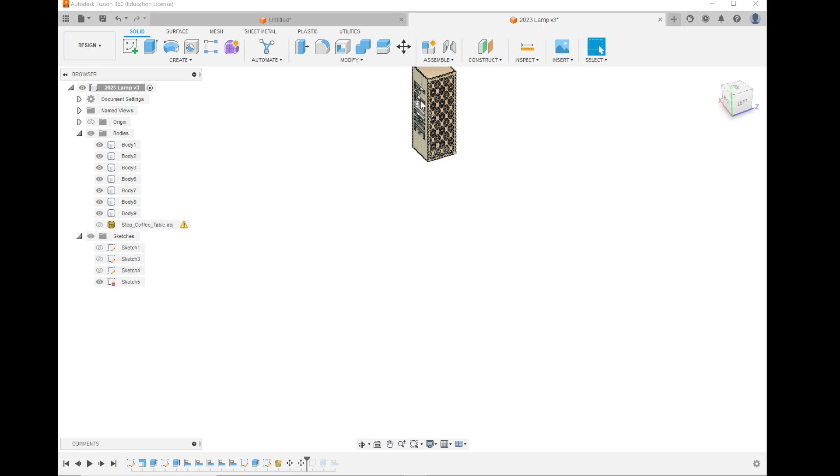Actually, I think we have time. Let's go to design. For this design, I'm going to hide the table—we don't need the table for this render. Let's say for this one, I'm not going to do it in all directions. I'm just going to do it behind this sheet, and obviously you can do better, you can do more on your design. So I want to sketch over here.

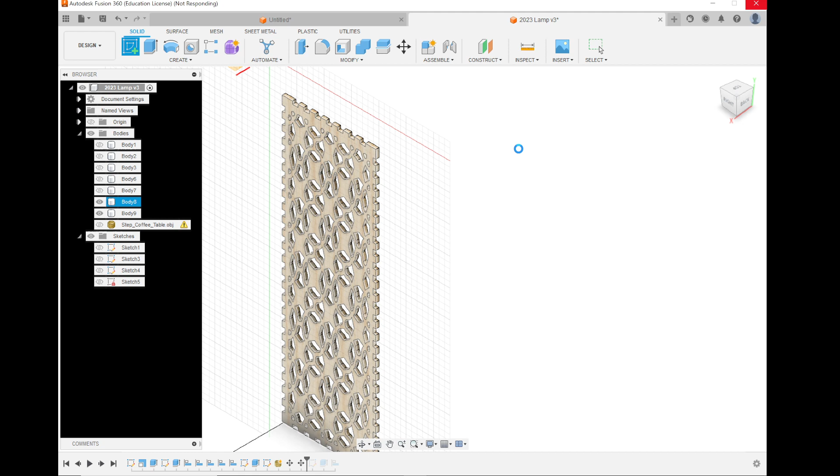I have a feeling the bell's going to ring before this is going to be done. And my computer's on power recovery mode as well now. I might save this part for another lesson.

But we've got that rendering, and I'll show you the result at another time as well. Yeah, I'll actually close this. Has this render been done yet? No, the rendering's still happening. All right, I'll show you the results of that rendering at another point. But that's it for this tutorial. Let me stop.